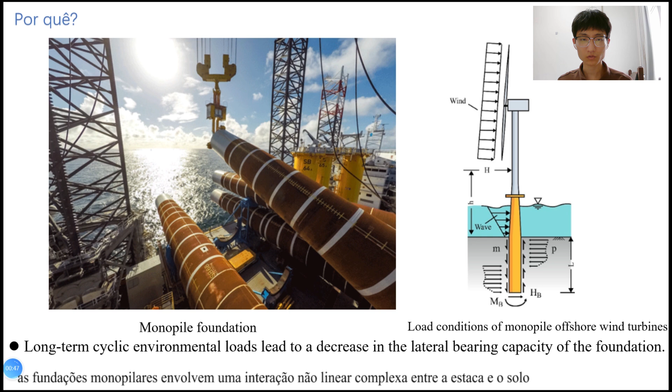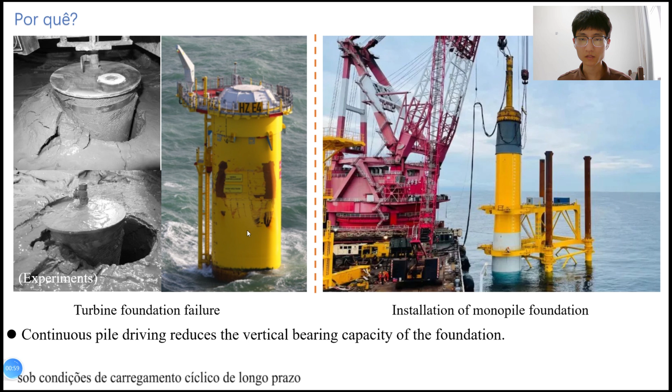First, the background. As a primary foundation type for offshore wind turbine, monopile foundation involves complex pile-soil nonlinear interaction due to continuous piling during installation and the weakening of bearing capacity under long-term cyclic loading conditions. Therefore, accurately understanding the weakening mechanism is crucial for wind turbine foundation design. So I will introduce the experiments, weakening model, and the numerical simulation in the two directions respectively.

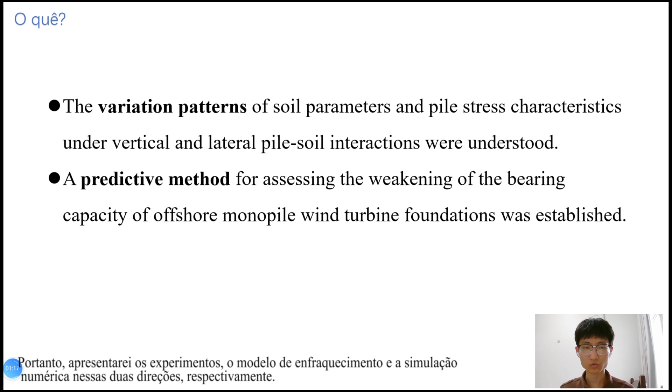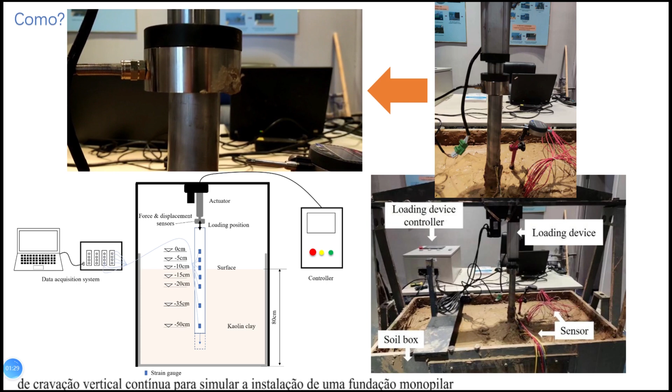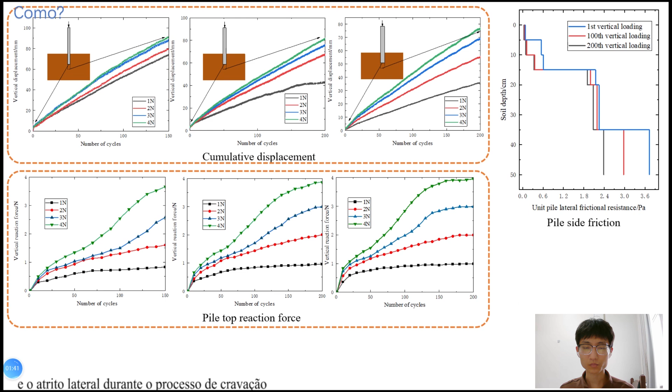First, I built an experimental system of continuous vertical piling to simulate the installation of a monopile foundation. I obtained the cumulative displacement, pile top reaction force, and the pile side friction during the piling process. The experimental data verified that the exponential weakening model can be used to evaluate the weakening of the vertical bearing capacity of the pile foundation caused by the piling process. Then the weakening model was numerically simulated using an Abaqus subroutine.

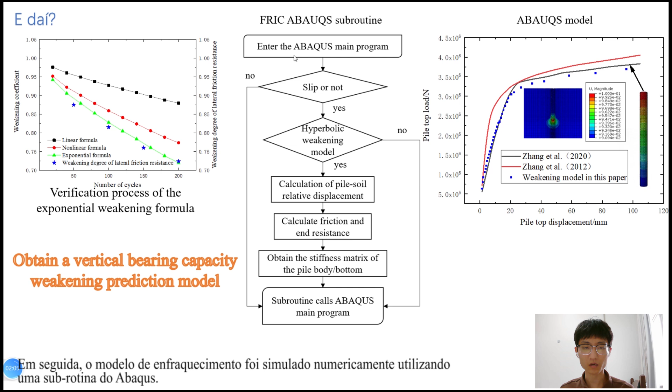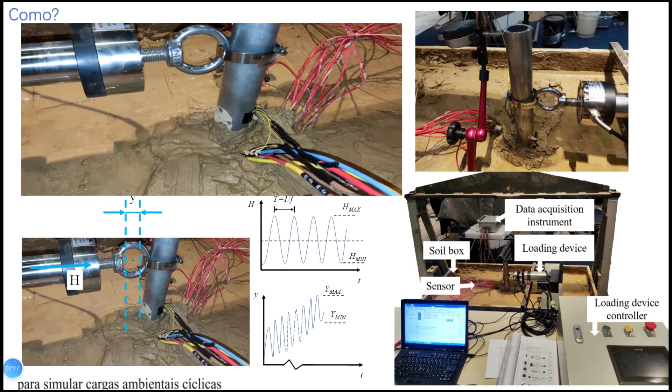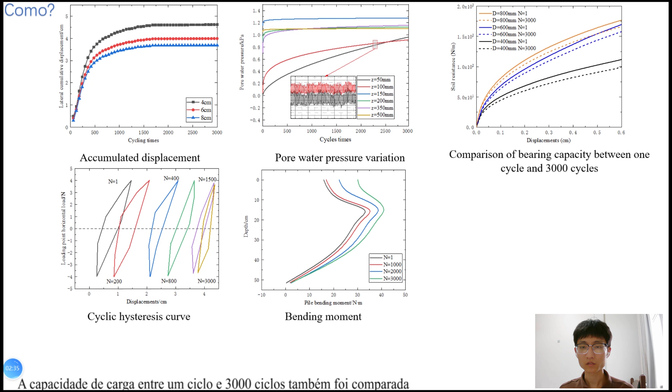Next, horizontal cyclic loading tests were conducted to simulate cyclic environmental loads. I obtained the lateral displacement, bending moment, and cyclic hysteresis curve for each pile. The bearing capacity between 1 cycle and 3,000 cycles was also compared. The reduction factor of the soil P-Y curve was fitted through the experiments, and then numerical simulations were also performed in Abaqus. That is all I want to share.